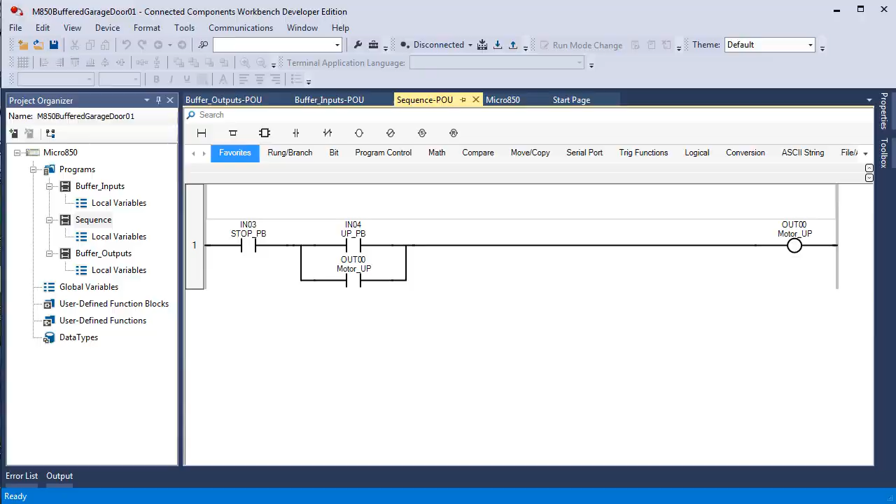Our next lab project, beyond the basic momentary start-stop logic. In front of you is the basic start-stop logic. And just a quick review, we're using a true if on because remember, we're using a normally closed stop push button. And the reason for doing that is so it is fail safe. It fails in the safe mode. The safe mode for a motor is the motor not running.

If we had a normally open contact switch, a normally open push button, then we would be using a true if off instruction here to show that the button wasn't pushed because the input wasn't on, so the button's not pushed. The problem is that if the stop switch fails, then it won't work. In other words, if you break a wire or the switch breaks and you push the button, nothing's going to happen. So we're using a normally closed push button for our stop push button.

A normally closed push button, not pushed, the contacts are closed and the input is on. True if on, stop push button, meaning it's not pushed. And then of course we have a normally open push button for the up because we want it momentarily closed to complete the logical path to turn on this bit in memory. And then when you release the button, this bit is now on. We just turned it on right here. This writes to that bit and this reads that bit. So when you release the push button, you maintain logical continuity and the motor stays running.

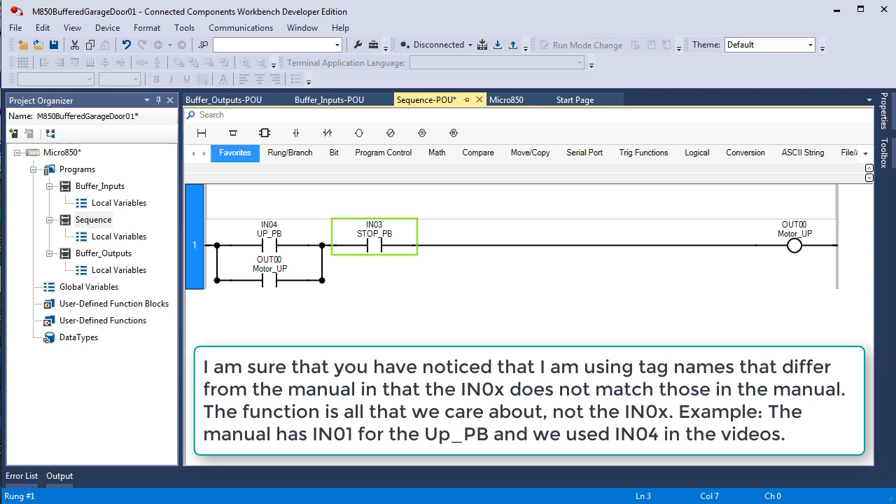We did move the stop push button over to here simply to mix things up a little bit so you didn't get the feeling that the stop push button had to be first because it's more important. As long as it is in series logically with everything in this rung, the motor will stop when you push that button. We also changed a couple other things around just so you don't get to thinking that these instructions and that address memory locations have to be in a particular format. So I moved this up to here and I moved this down to here. So this logic is 100% identical to what we started with just a few moments ago.

And it reads, if motor up bit is on, or if you're pushing the up push button and you're not pushing the stop push button, then energize the output and set out 00 on. And when you release the push button, input 4, by that time output 00 is on. So when it comes back and it scans the rung again, it reads it and it says if output 00 is on, or if you're pushing the push button. Well, you're not pushing the push button anymore, but output 00 is on because you turned it on. And if you're not pushing the stop push button, the rung is true and it turns on output 0.

And remember that this rung executes thousands of times per second. It doesn't matter that output 00 is already on. It has nothing to do with it. The rung is true, it sets the bit to 1. It's true, it sets the bit to 1. Thousands of times per second. When the rung goes false, it sets the bit to 0, thousands of times per second. Just something to keep in mind.

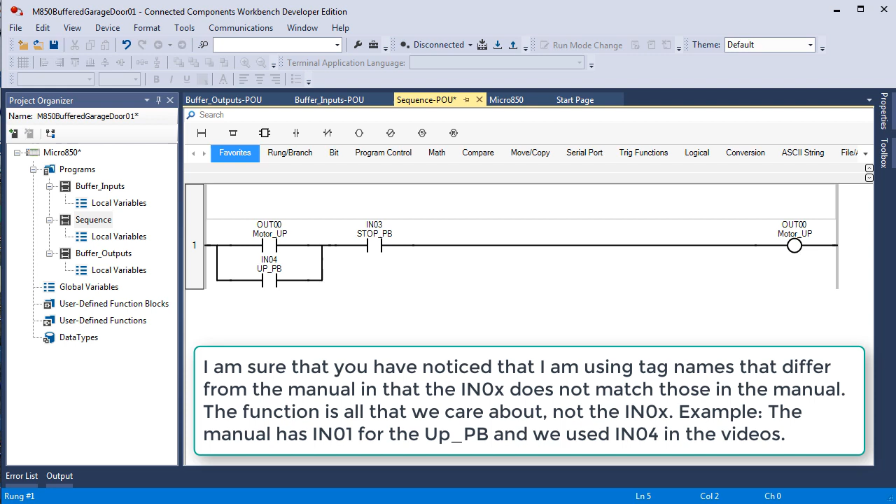So the next thing we did is we said, all right, we can start and stop this motor. Now, remember this is motor up, and we need a reversible motor for the garage door because we want to run it up and we want to run it down. So we have to be able to reverse the motor. If it were a DC motor, you would do that by reversing polarity. But this is an AC motor. And AC motors have other requirements to reverse them.

Now, if it's a reversing single-phase motor, there's a capacitor involved. For a reversing AC motor, there's going to be at least a third conductor, but that's not the only way to reverse an AC motor. We're doing a three-phase industrial garage door opener. Our AC motor is three-phase. And with three-phase motors, you just reverse one phase. And you do that by using a reversing starter.

Now, a reversing starter actually has two starters. They're two 3-pole contactors, if you like, with aux contacts. And one of them, you have the phases, and we'll just call it ABC, and then the other one it's ACB. It doesn't really matter which one you reverse. It could be BCA. But you reverse one phase and the motor goes the opposite direction.

So this is our circuit that turns on the coil for a starter that makes the motor go in the up direction. So this output 0 doesn't go directly to the motor. The output terminal on the controller is not feeding voltage to the motor. It's feeding voltage to a coil that's part of a starter, or if you like, contactor.

So we're going to add another true if on right here, and we can pick our tag from here. We would go to up limit switch, input 2, double click. Now we have it. Now I'm going to download this and go online. I'm going to pause while I do that.

I find it interesting that we were looking at the sequence program when we downloaded, but it pops up with buffer inputs. No harm. I was just surprised that it didn't pop up with the same view we had offline when we downloaded.

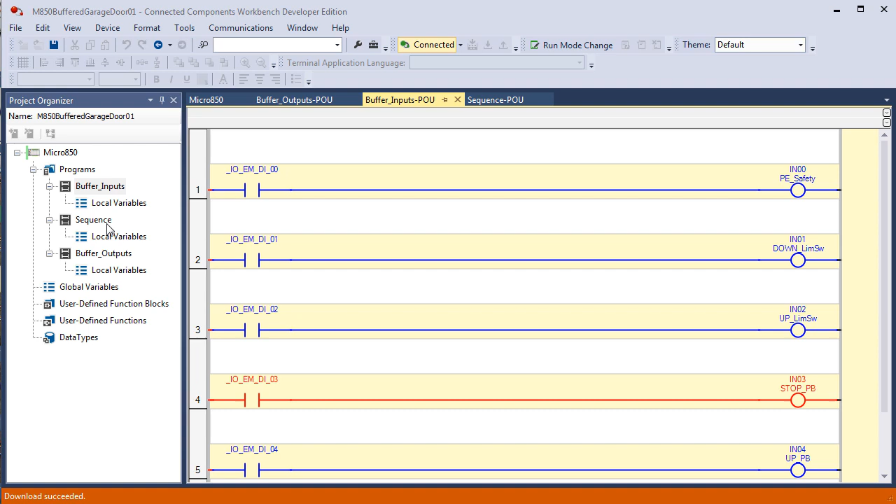So here is our static rung. Now there is one thing here that's not static. As a matter of fact, I could ask you this. Looking at this logic and understanding what these 4 bits are, you've got a stop push button, input 3, you've got an up limit switch, input 2, an up push button, input 4, then you have output 0, which is the motor up coil for the starter. What state is this door in right now? Not a trick question. I think it is in the manual. It does ask whether the door is up or down.

Now remember, this is when you look at what's true. Pressing input 4, let's try that. See, input 4 went true, right? But the door's not going up. What's keeping the door from going up? That's right, the up limit switch. Well, since this is a normally closed limit switch, and if it were closed, the input would be on and this instruction would be true, that means that that switch is tripped. The door is in the up position.

To make this completely static, if I wanted to start the motor going up, I would have to move the door off of the up limit switch. In other words, I would have to run the motor down.

I could flip on input 2, then we could start the door, run it until it hits the up limit switch. But instead what I'm going to do, I'm going to leave it right there, and we're going to add a second rung of logic for the motor down.

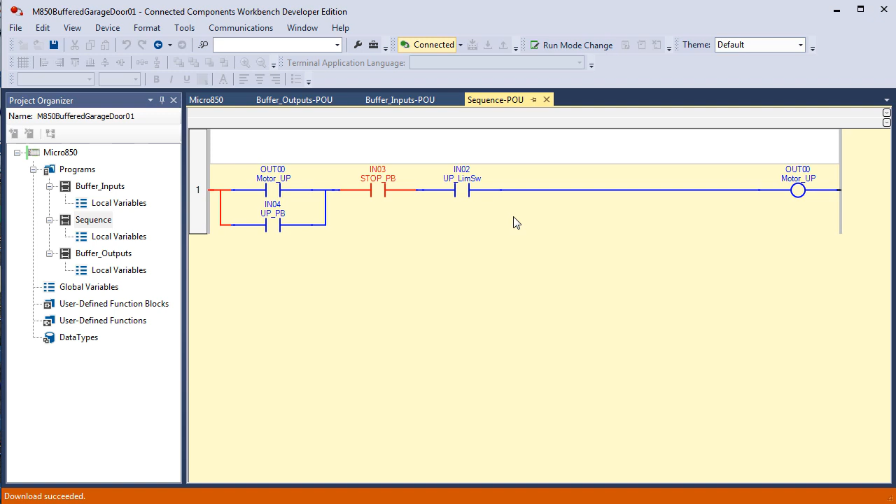If they're two identical rungs, then it really doesn't matter, because both rungs are either true or they're both false, so they're not going to fight each other. But if I had two rungs that were both trying to control output 0, 0 and the logic was different, the last one in the order of scan is the one that would dominate. So I'm going to add the motor down rung, which really should look pretty much just like this. And to do that, I'm going to save and go offline. Save and then disconnect. Now we're offline.

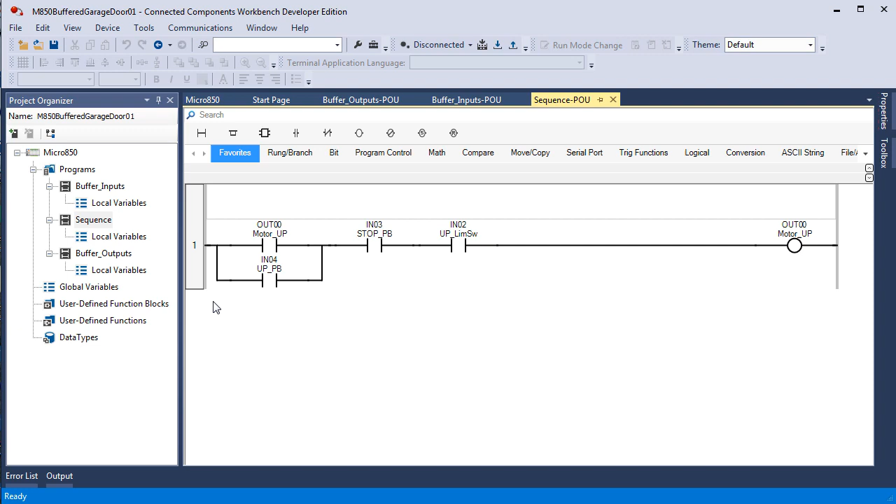I wouldn't say that I was lazy, but I don't believe in doing things the hard way. I would pick that rung, Control C for copy, Control V to place it right below that one, just like you would with a word processor. Now I have two identical rungs. This is up and we want this to be down. To change it, it's real simple. There is only one stop push button, by the way. We don't have two stop push buttons. So we don't have to change this, but we do have to change some of this.

The first one I would change would be motor up to motor down. If I click on this, I think it's output 1. Yep. So I would go over here, pick output 1. That one's taken care of. Stop button stays the same. Up limit switch. Oh, we want down limit switch. That's input 1. And we have a down push button. So down push button, input 5. And that should do it right there.

Here we have, if the motor's already energized, or if you're pushing the up push button, you're not pushing the stop button, and you're not all the way up, then run motor up. This one is if the motor's already on going down, or if you're pushing the down push button, and you're not pushing the stop button and you haven't hit the down limit switch, then go on down. We're going to download that, and I'm not going to make you watch me download. Now we're back online.

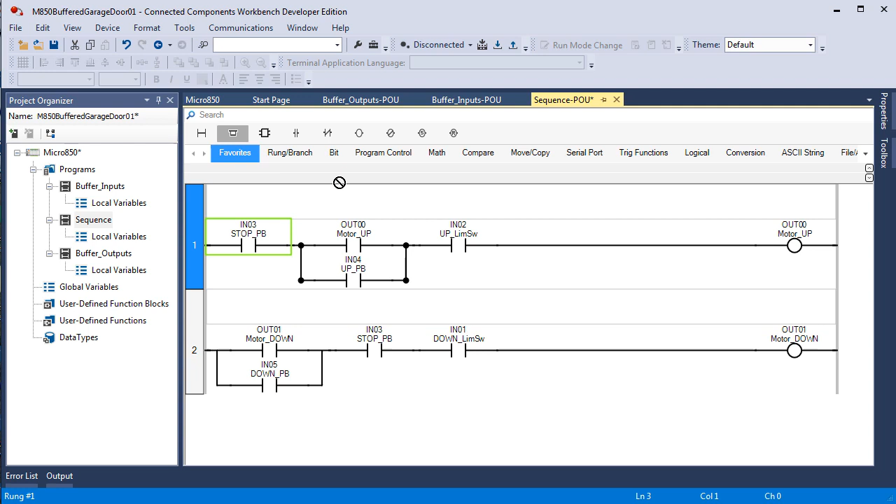So I'm going to put it there, and then I need to move these 3 instructions inside between here and here. I don't know if I can drag this. Nope, won't let me drag it. With RSLogix, you could drag that. And that's why I'm doing it this way instead of following the steps in the manual. I'm going to force myself to go through the misery of doing this the first time.

So I move that instruction over to there. I move this instruction over to here. Now this instruction, we'll try moving it there. Now see, that didn't work. So I'm going to go up and undo that. See, it made a mess. Instead, I'm going to put a branch around that and then bring this over here. And then delete this branch around.

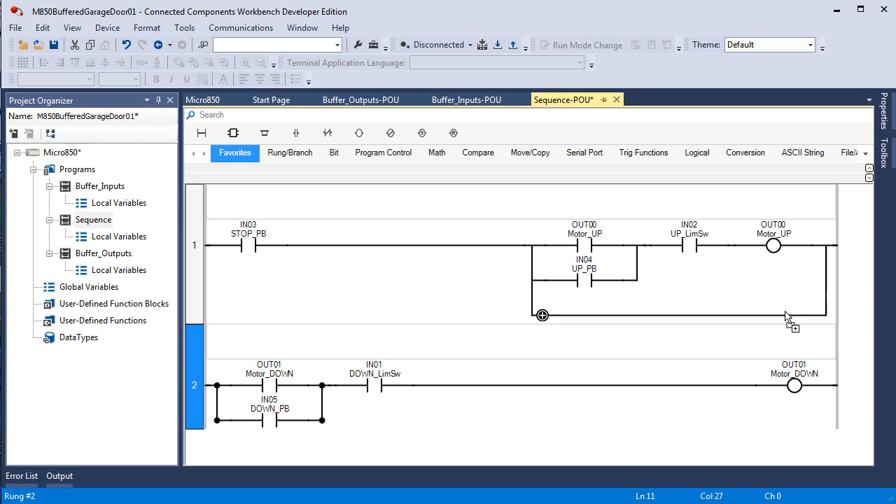Now I need to get this logic, except for the stop push button, right here. So I'll delete the stop push button because I don't need that. And I'll just drag up. See, we're getting close. Now I need a branch around this right here. So the focus is there. And then delete this.

In the manual, I flip the push buttons and we'll call it the aux contact or the seal-in contact. I flip the positions around to what's more conventional. So I'm going to flip these around. So I'm going to move this up here. Move that down here, move this up here, and move that down here. So now I have the push buttons on top and the aux or seal-in contacts on the bottom.

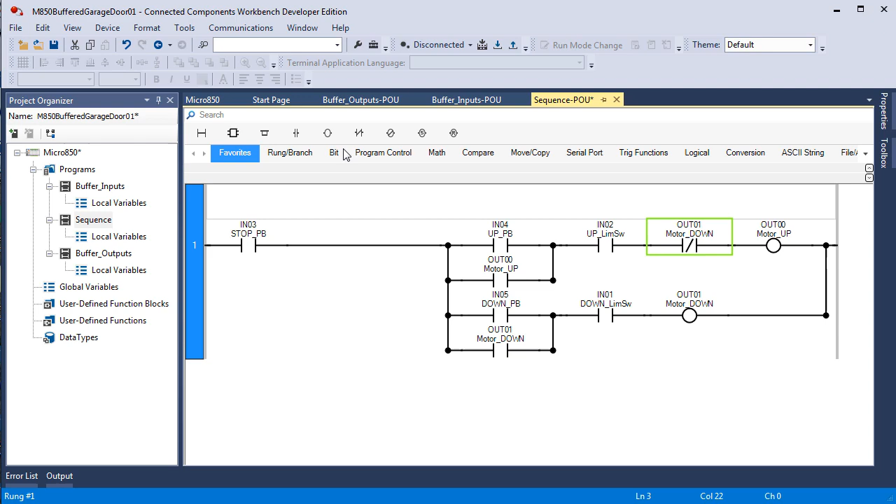One of the last things that we did in that particular lab was we eliminated the problem of both of those motor starters being energized at the same time and overloading the motor. So I added instructions, true if off, into each. Well, I guess we could select it from here. I don't want output 0 coming on if output 1 is on, right? In other words, if output 1 is on, you can't turn on output 0. So we'll do the same thing in the other half of this logical circuit, only we will pick the up motor. So now let's download it and check it out.

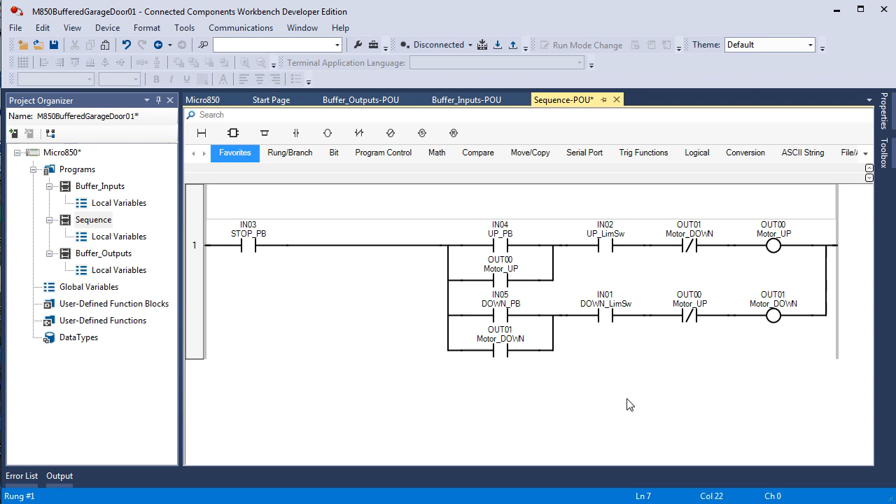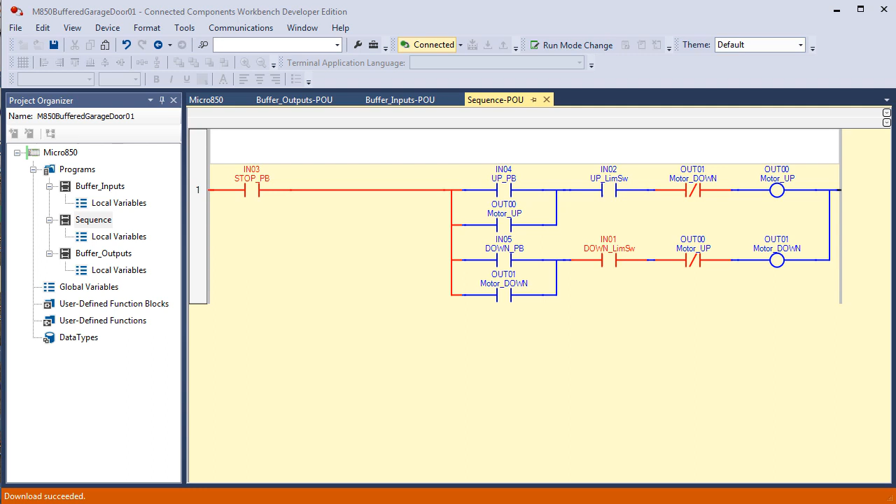Save, download, pause. Back online with our logic. Neither motor is running, so both of those conditions are true. True if off, output 1. True if off, output 0. Notice that the up limit switch is tripped. It's false. So you can't go up. You can only go down. Let's go down, and that is input 5. Now we're going down, and that's going to untrip the up limit switch.

And we're going to stay in that state. Let's just look at it right there. You can see if I push the up button 4, see it goes true, but because we've already energized output 1, you can't energize the up motor. If the motor keeps driving the garage door down, eventually it will trip the down limit switch. And it'll stop.

Now I had you do something where I had you push the up and the down button. Then I asked the question, untrip the down limit switch. Okay? This could be true if the garage door is somewhere in between. And of course, pushing the up and the down together, no matter what I do, if the up motor was already energized, last man wins, so to speak.

In other words, output 1 is off, so in the upper part of the rung, that's true, turns on output 0, and remember the logic reads left to right, top down. So no matter what happens, it's going to read the upper half of this before the lower half. If the upper half is true and turns on output 0, there's no way that the bottom half could turn on output 1. And that's pretty much everything that we did in that lab.